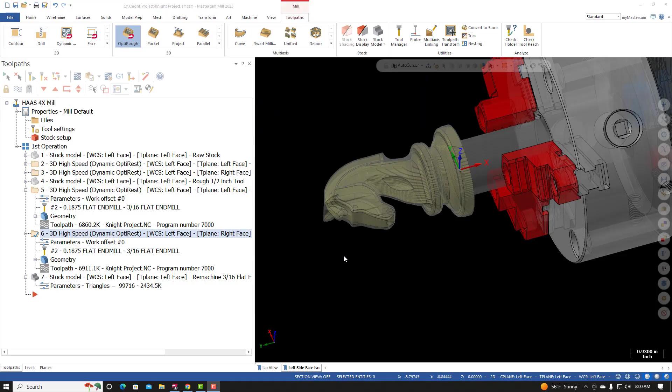Now that we've removed the material from underneath the chin and the extra material left on the base, we need to focus on removing the excess material left between the ears. We're going to use one of the existing 3/16 tool paths, and make a few changes so that the tool path can focus on just this area.

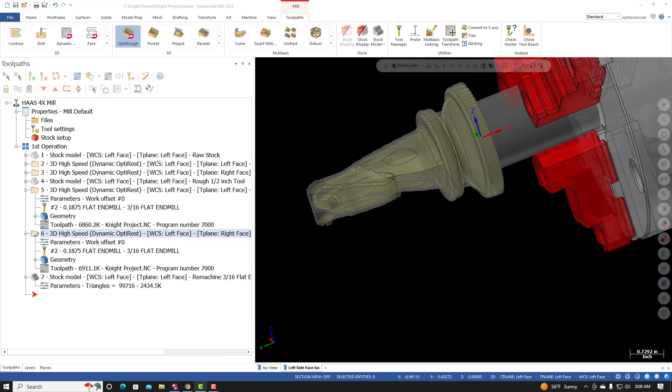If I go to the project page, the below images and instructions are to be used as reference while programming the front and backside secondary roughing toolpaths using a 3/16 flat end mill. The next few operations will be used to remove the excess material between the ears of the knight. So we're going to create these two tool paths. We're going to copy one of the previous tool paths that uses a 3/16 flat end mill and make a few changes to make it work for this operation.

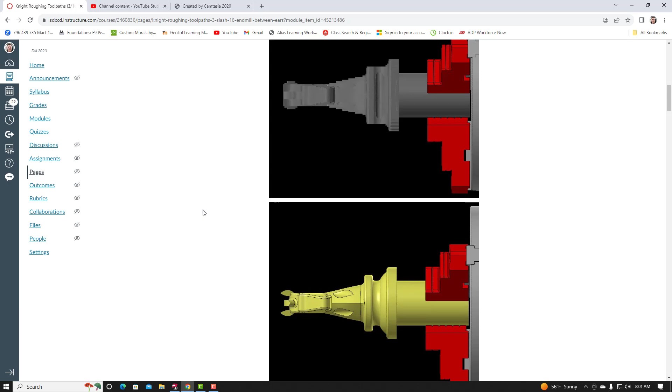Reference the images below to determine where the excess material is left from the previous tool paths. Using the spline tool, draw in a boundary around the areas where the previous tool couldn't reach. The Z location is located at the center of the part. This boundary will be used to control the movement of the 3/16 flat end mill. This containment boundary will be used by both roughing tool paths, as shown in the image above.

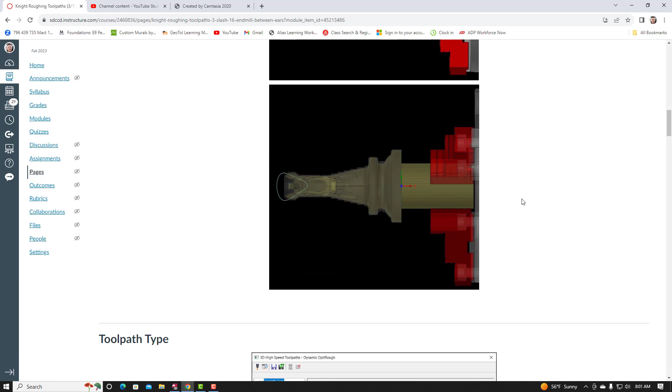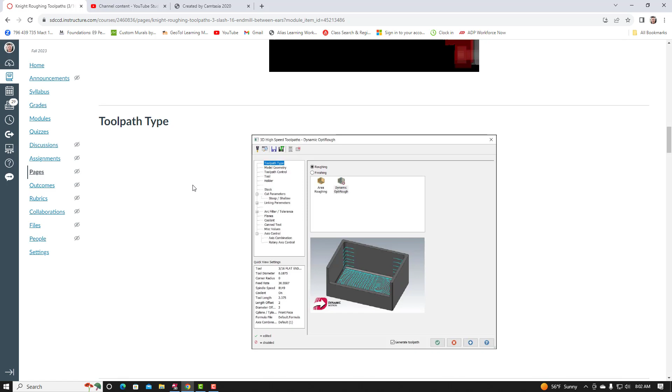So what we're going to do is focus on this area, and in this image you can see a spline that's drawn, which we'll use to control the movement of the tool. So we'll need to draw in another boundary. We're going to copy one of the existing tool paths and make some changes so that it works for cleaning up this region.

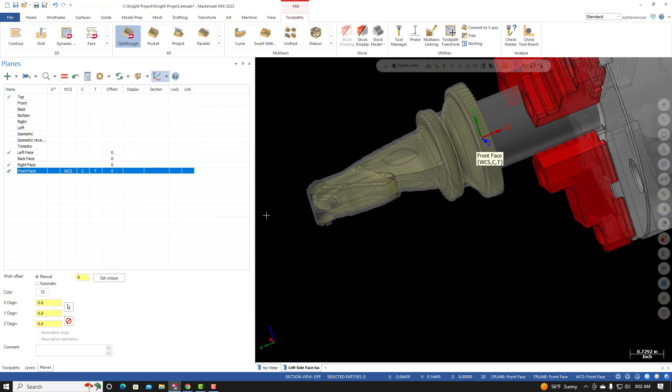I'll go back to Mastercam. I'm going to change the construction plane and the tool plane to the front face. So I'll select front face in the planes manager, hit the red equal sign, and then look at it from a top view.

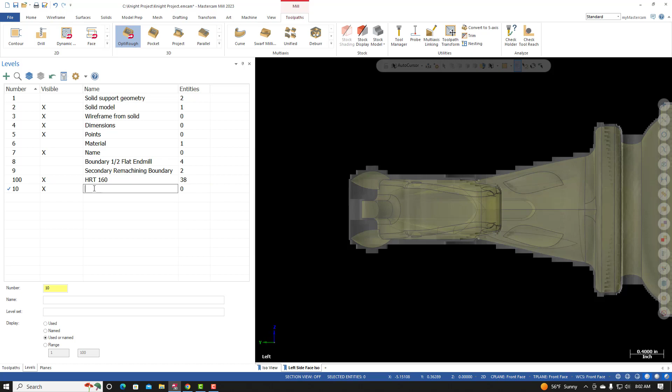I'm going to draw in a spline that captures this area. I'll go to the level manager, create a new level, and call it boundary ears, or something that makes sense.

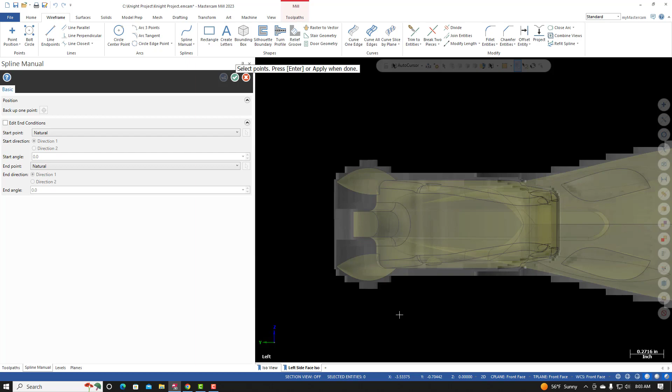I'll go to the wireframe tab, and I'm going to draw in another spline. My C-plane is still set to 2D, and with it set to 2D, regardless of whether or not I lock onto something, it should still be placed on a 2D plane. So what I'll do is draw in this boundary, still avoiding locking onto any of the geometry on my screen.

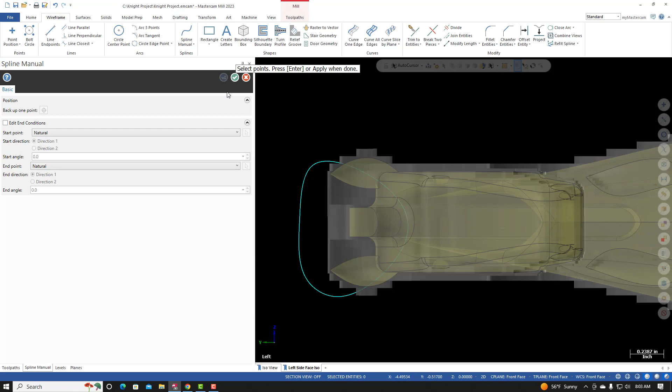So I drew in this boundary. I'll select OK, and go back to the toolpath manager. I'm going to minimize the existing toolpaths and stock models, and select one of the 3/16 flat end mill toolpaths, the left one. Right click on it, copy. It's important that you are careful not to copy all of the toolpaths. Place the insertion arrow at the very bottom, then right click and paste. Expand the new toolpath.

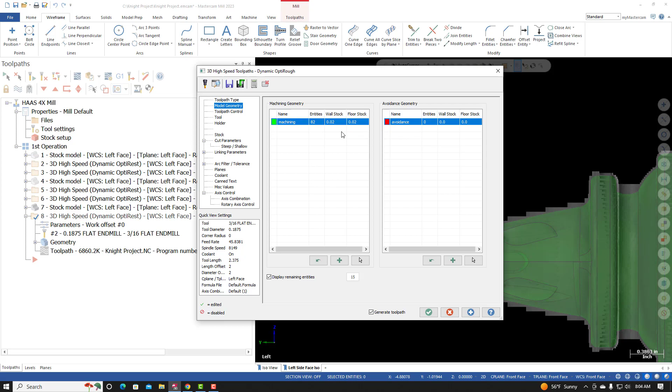Go into the parameters, and I'm going to start with the model geometry. We're using the same model geometry, so we do not need to make any changes here. Toolpath control: we need to change the boundaries, so I'll deselect.

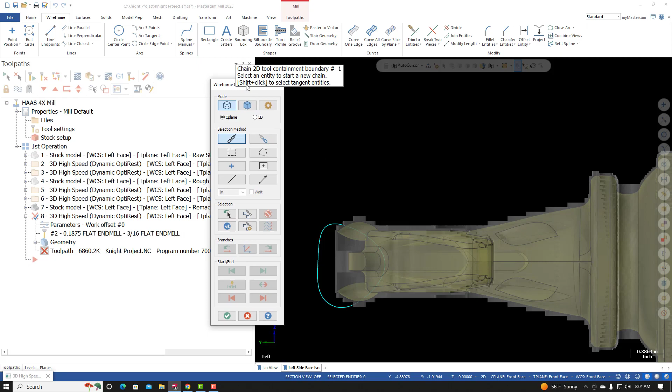I'll start by removing these selected boundaries from this toolpath, then select this icon, containment boundaries. The wireframe chaining dialog box appears. I've got mine set to C-plane. Selection method is chain. I'll select this boundary. It says the selected entity is not parallel to the C-plane. Plane mask is enabled, so I'll select OK.

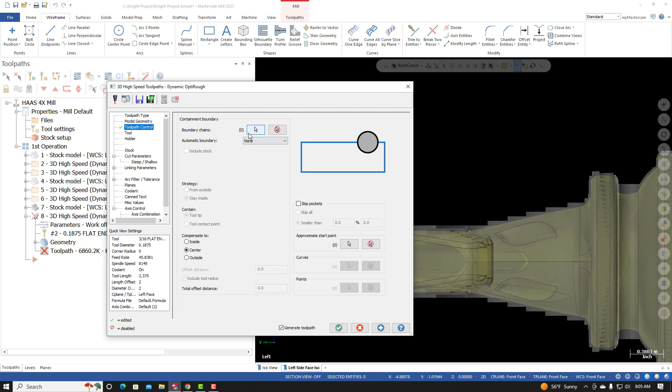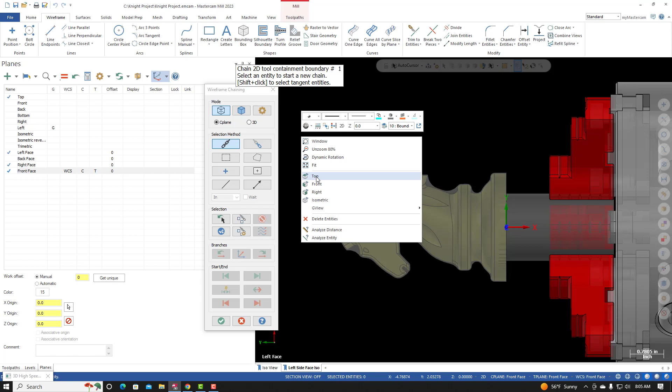My C-plane is set to front face. It should have let me select it, so I'll go back to my planes. Front plane—oh, it might have taken on some three-dimensional property. Nope, it's good. Front face equals top, that's correct.

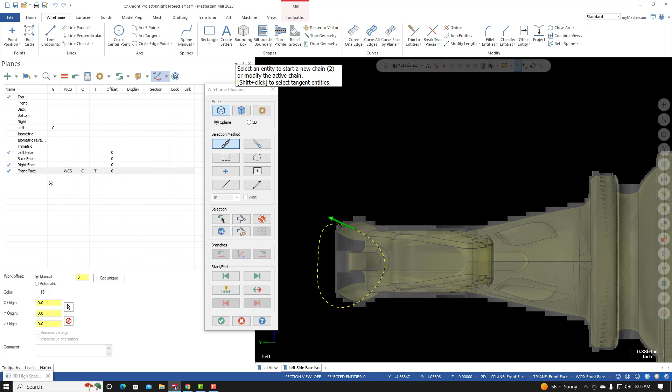I'll select the chain. So I must have changed my C-plane at some point. You want your C-plane set to front face at this time.

It's working. From here I'll go to the tool, and I don't need to make any changes here except for the comment. I'll go to the tool page on the project page, and the note or comment is changed to remachine ears front, all caps.

I'll need to change the planes that this toolpath is referencing. So for the tool plane, I'll select this icon.

I'm going to change it to front face, and then I'll carry it over to the construction plane. That might have been the issue, because this toolpath was referencing the left side face when I selected the toolpath control boundary, and that was not parallel to that tool plane. That might have been the issue. So I probably should have changed the planes first and then started making changes.

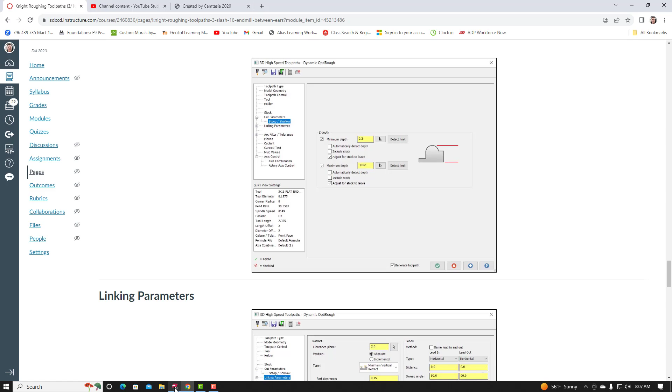So from here, we might have to come in and change the steep shallow. I'm going to leave the minimum depth set to 0.2, and set the maximum depth to minus 0.01. If I look at the project page and go down to the steep shallow section, they're using minus 0.02, so just to be consistent with the project page, I'm going to change this to minus 0.02, 20 thousandths. Linking parameters, I don't think I need to make any changes.

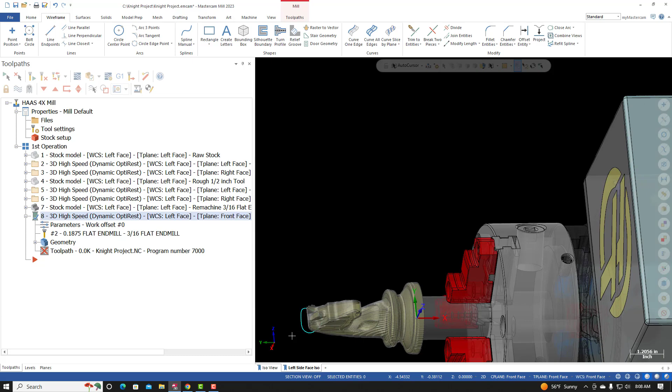So from here, I'll select OK. I'll go back to the toolpath manager, and you can see that Mastercam is regenerating the toolpath with the changes that we've made.

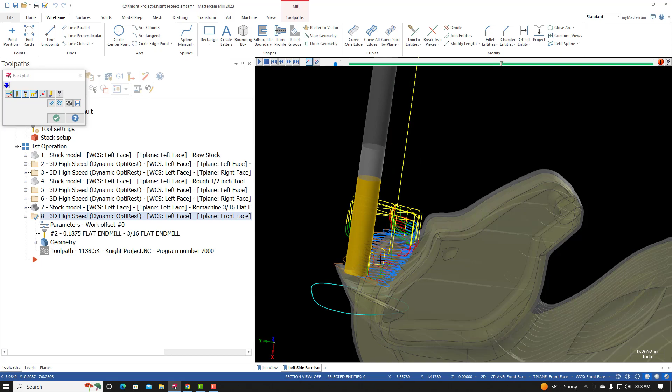If I run it in backplot, so I just have this toolpath selected, and I run it in backplot, it's machining well above the area where the material is left between the ears, and we really don't need that to happen. So what I'm going to do is go back in and change my steep shallow so that the minimum is slightly above where the ears are relative to the Z0 of this tool plane.

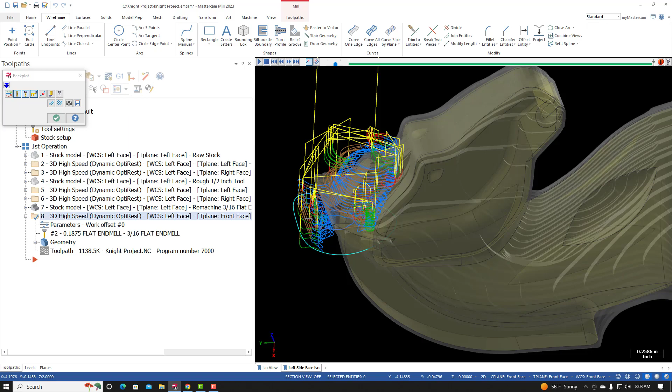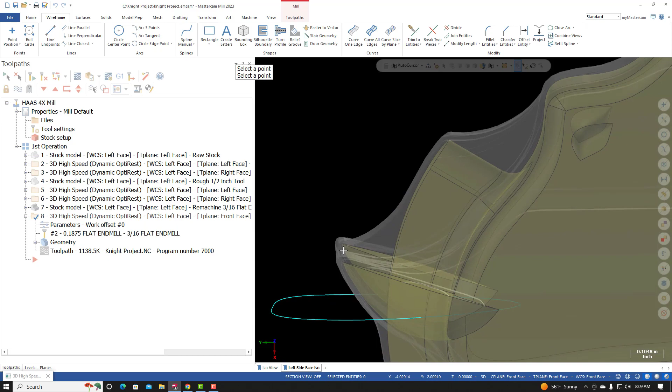I don't need it to focus on this area, I just need it to focus right here. So a way that we can control that is go into the parameters, go to steep shallow, and we could pick select something off of the screen. So if I select this icon and then pick something that represents the top of the ears right about here, and then add 100 thousandths just to give it a little extra material or a little extra room to move. So plus 0.01, or plus 0.1 I should say, and then I'll make that a nice clean number. Let's say 0.25.

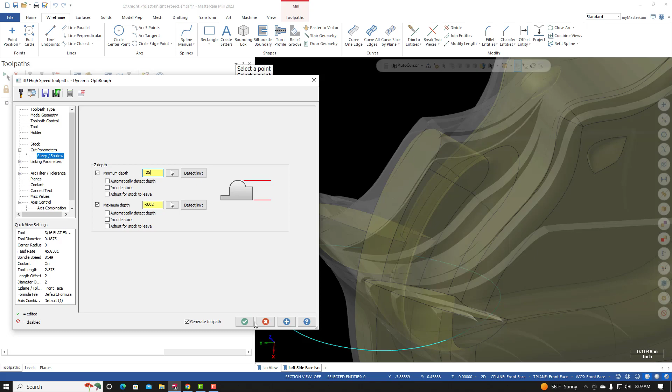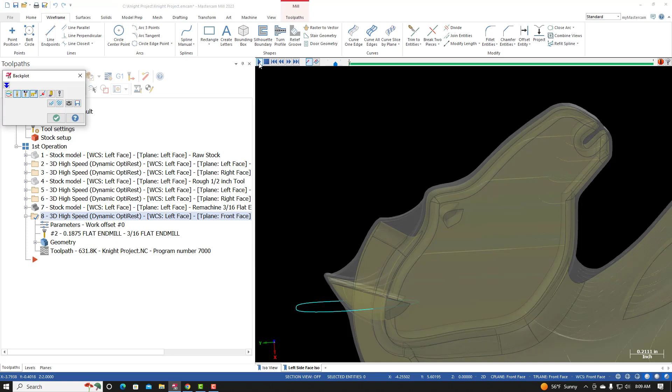I'll select OK. It'll regenerate. And 100 thousandths would be right about here, so I don't think this will be an issue. Now if I run it in backplot, let's see what we get. So you can see that it's no longer worrying or focusing on the material up here.

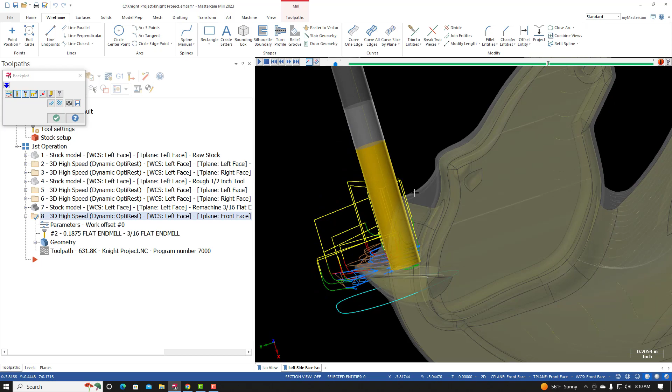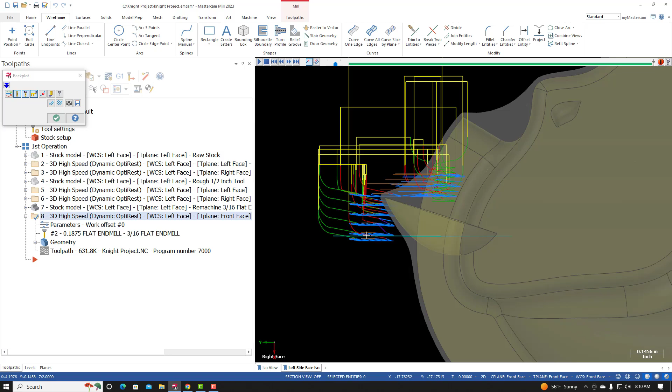We're going to come in with a 1/4 inch ball mill, and we're going to do a semi-finished toolpath. We're going to intentionally leave 5 thousandths on the walls and the floors, and the 1/4 inch ball mill will remove the majority of this material. It will get in here and remove some material. And if I look at it from a front view, you can see that the toolpath goes slightly below the center line of the part, the center line of the part being Z0. So that looks good.

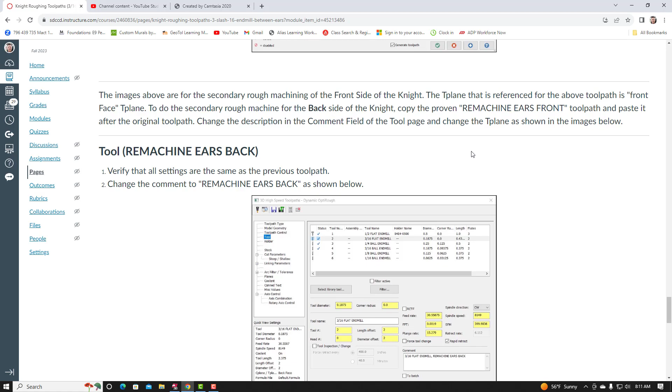We'll need to do the same thing, or something similar, for the back side. If I go back to the project page, go to the bottom of the project page, the images above are for the secondary rough machining of the front side of the Knight. The T-plane referenced for the above toolpath or paths is front face T-plane. To do the secondary rough machine for the back side of the Knight, copy the proven remachine ears front toolpath and paste it after the original toolpath. Change the description in the comment field of the tool page and change the T-plane as shown in the images below. So what we're going to do is copy the toolpath that we just created.

We're going to make several changes so that it works for the back side between the ears. I'll go back in Mastercam. I'll exit backplot. With just this toolpath selected, right click, copy. Next to the insertion arrow, make sure that the insertion arrow is at the very end. Right click and paste. I'll need to make some changes.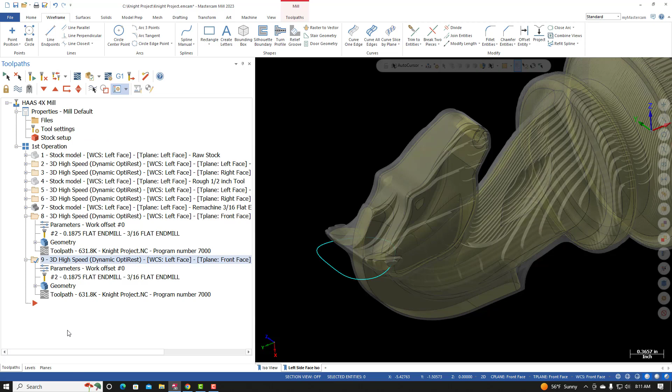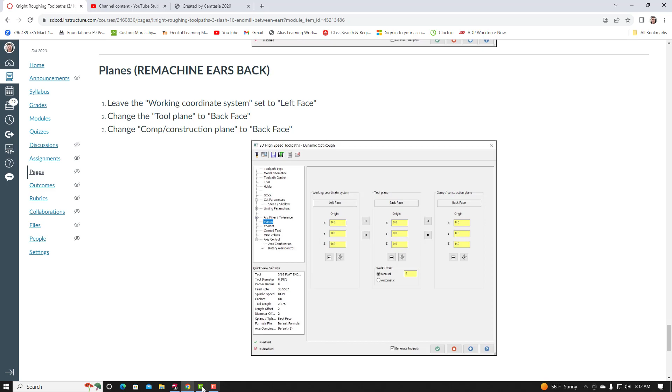According to the project page, on the tool page, we're going to change the description to remachine ears back. And then for the planes, we're going to change the tool plane to back face and the construction plane to back face, like you see here in this screen capture. I'll go into the parameters for the new toolpath.

I'll go to the tool page, remachine ears back, and then I'll go down to the planes. I'm going to leave the working coordinate system set to left face. This will establish A0, and then I'm going to change the tool planes to the front, which will tell the NC file to rotate 90 degrees, and then I'll tell it to rotate 180 degrees.

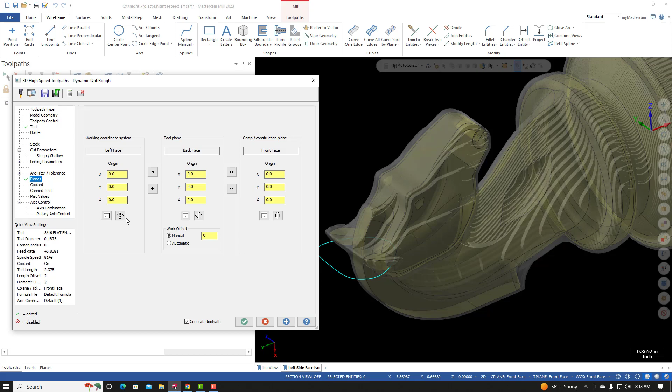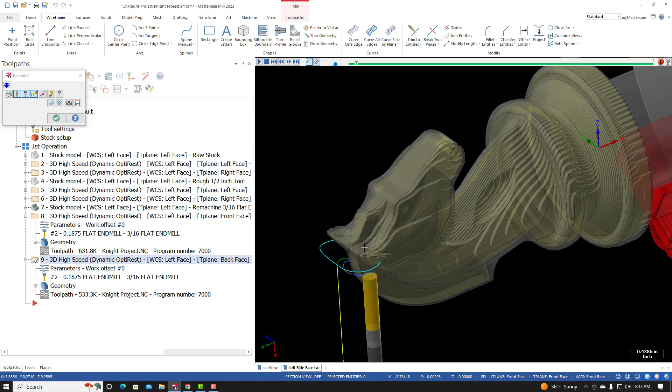So from here, I'll set the tool plane to back face, and then I'll carry it over to the construction plane. I'll select OK. Needs to regenerate this toolpath. With just this toolpath selected, I'll run backplot. So it's machining an area that doesn't necessarily need to be remachined at this time.

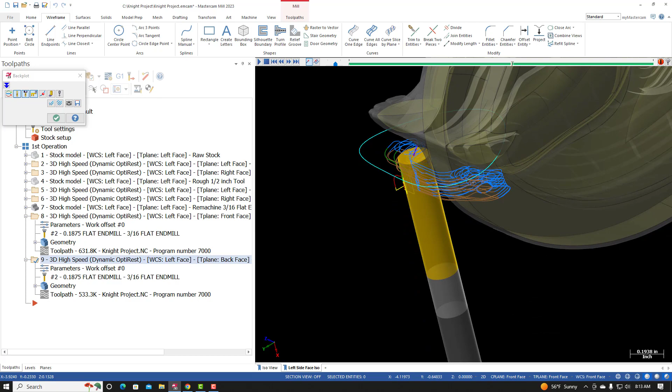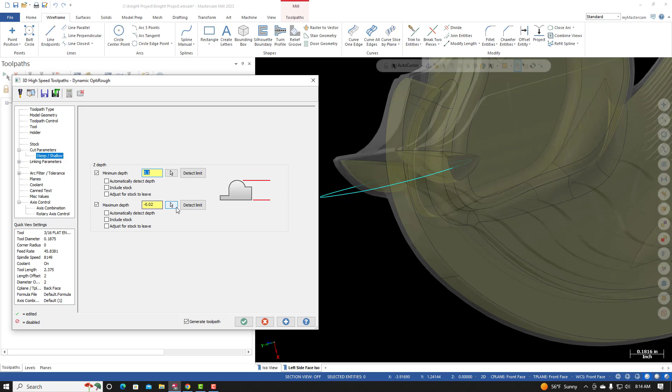So what we can do is we can go back into the steep shallow settings, and we can change the minimum and maximum. So that's what I'll do. I'll come back in, and for steep shallow, I'm going to set the minimum to 0.1. I'll leave the maximum set to -0.02. We'll need to regenerate the selected toolpath. I'll run it in backplot again.

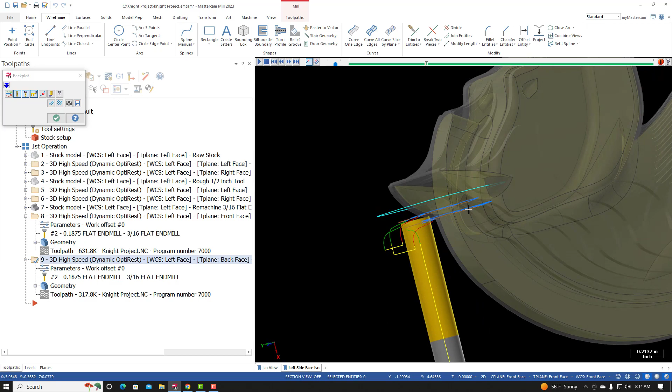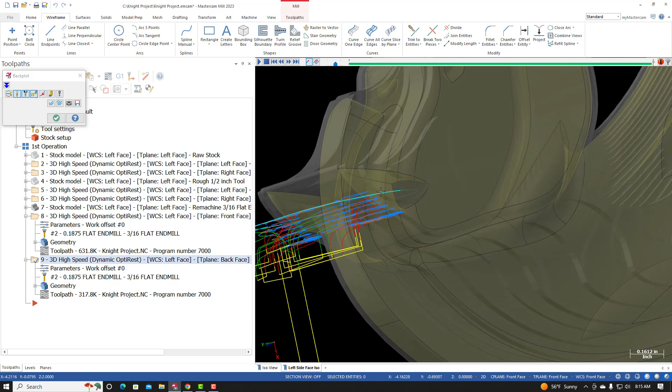And you can see it's now starting to cut closer to the center line. And you can see that the ears lean forward, so they're not vertical and they're not on center line. I suspect we're going to have to go beyond the center line of the part.

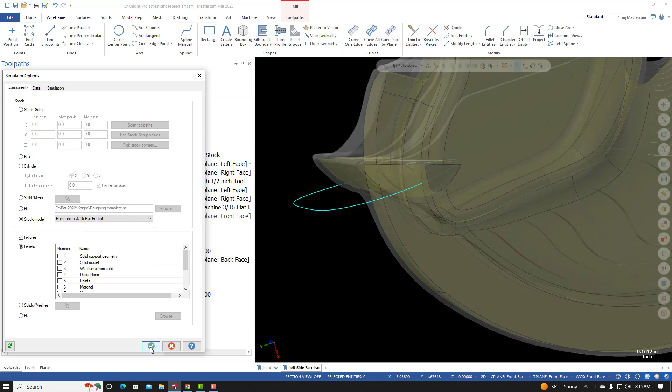Let's run these toolpaths and verify and see what type of material's left over after these two toolpaths. Before you go to verify, save your work. And before I go to verify, I'll need to update my stock model. So I'll go to simulator options. For the stock model that represents our material inside of verify, select the remachine 3/16 flat end mill stock model. I'll select OK. And now with these two toolpaths selected, I'll run verify.

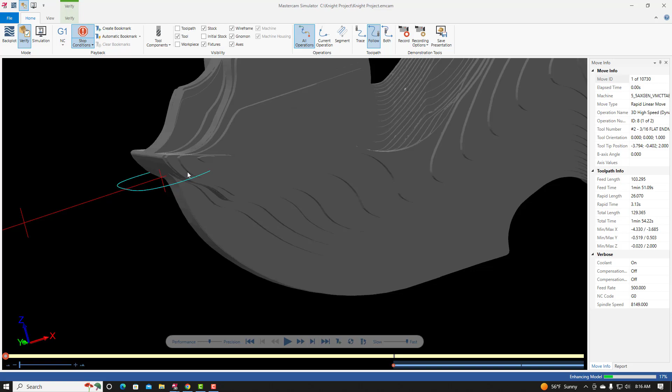Once you're inside of verify, make sure that stop condition collision is still turned on. If Mastercam ever crashes, there's a good chance that stop condition collision will be turned off when you restart the software. So I like to check this every time. And now with those two toolpaths selected, I'll run verify. And we can inspect the model.

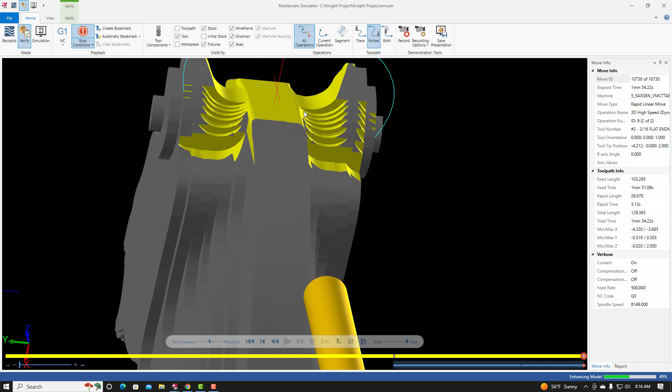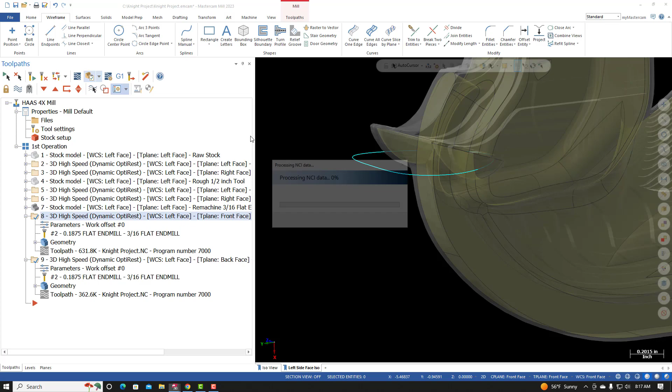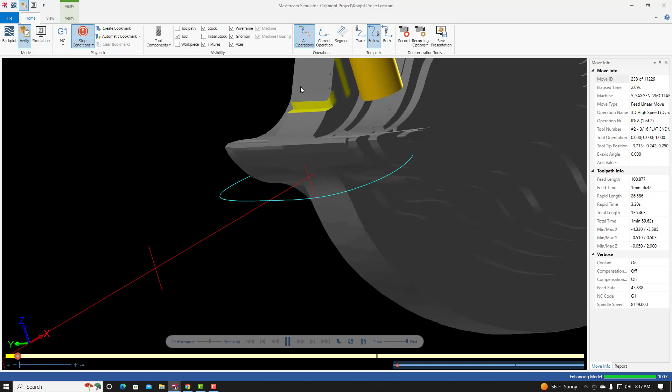We could probably send the back toolpath a little bit deeper to remove a little bit more of this material. If I exit verify and then go back into the parameters, if I change this to -0.05, we should get one more depth of cut. And once again, with both of these toolpaths selected, I'll run verify. Inside of verify, I'll hit play. And there seems to be a little bit of unnecessary machining or cutting of air. And I think we're good.

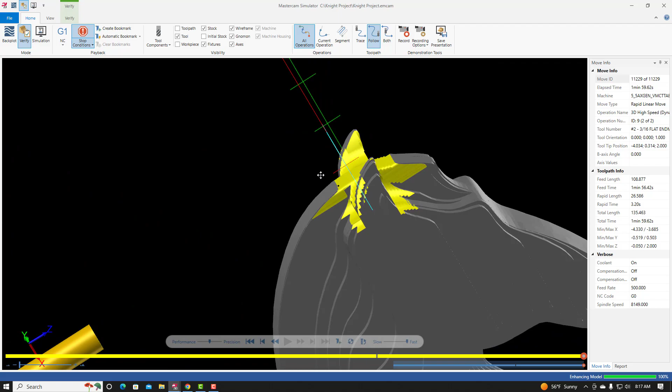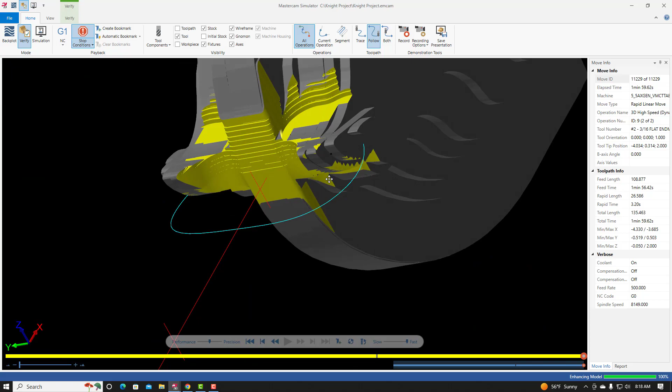We're going to come in with a 3/16 ball mill, and it's going to do the finish pass between the ears. And if we see any undercutting at that time, we might have to come back in and adjust the material that's being left on the walls and on the floors from this toolpath. But we'll have to determine that when we run the finishing toolpaths inside of verify. So from here, I'll exit verify.

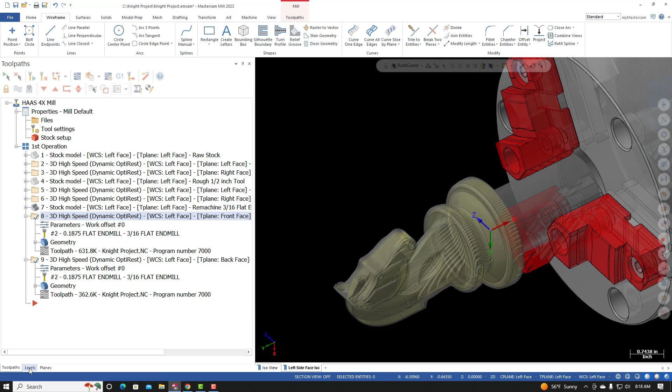And I used a view sheet that turned off that level. So if I go back to my levels, boundary between the ears, go back to the toolpath manager, I'm going to turn off the stock model that's currently visible. And then I'm going to create another stock model that shows us what these two toolpaths have done. So with the insertion arrow at the very end of the toolpath group, I'll go to the toolpath tab, stock model. We'll call this one remachine between ears. For the initial stock shape, I'm going to use the previous stock model, so remachine 3/16 flat end mill. And then for the source operations, select the two toolpaths that we just created.

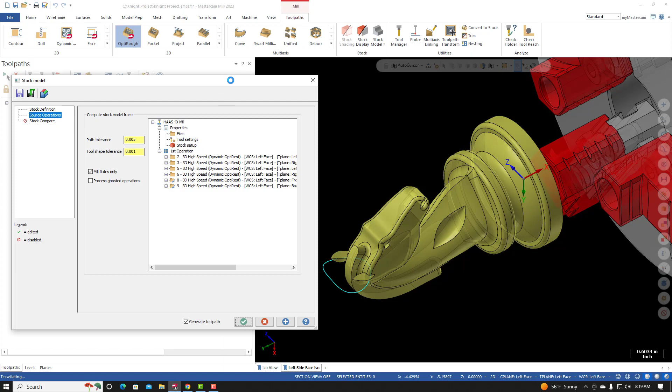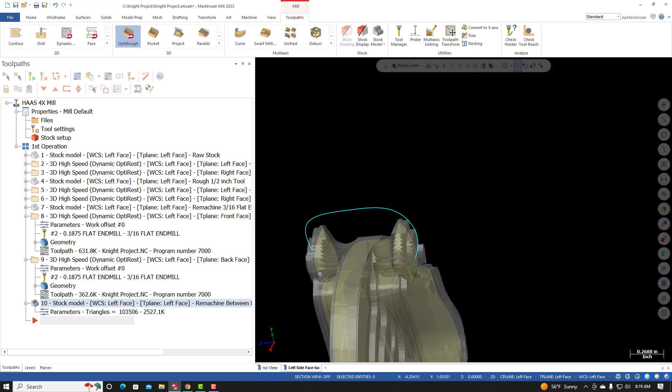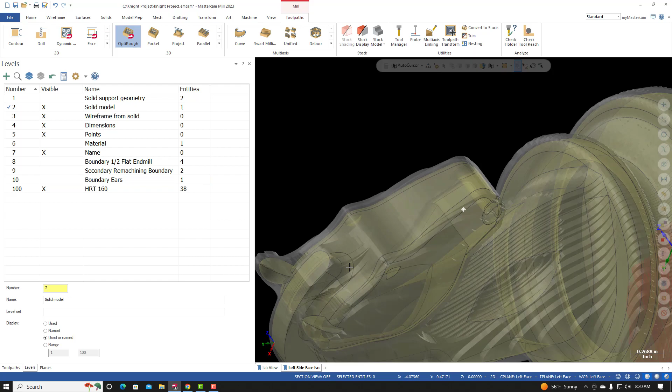It's going to process the stock model. Once the stock model has been created, you can inspect it, and you can see what these two toolpaths have done. That appears to be good. So from here, I'm going to make this boundary invisible. So I'll go to the level manager and I'll make the boundary ears invisible. Inspecting the stock model, everything appears to be good.

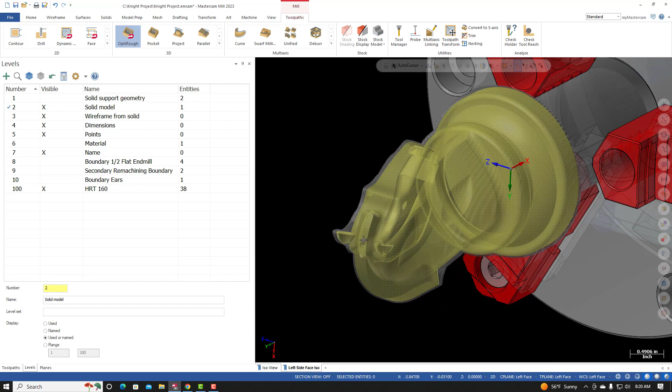And we're now ready to do the semi-finish toolpath with the 1/4" ball end mill. And then we'll program a finish toolpath with a 3/16 ball end mill. And then we'll actually program a finishing toolpath between the ears with the same 3/16 ball end mill.